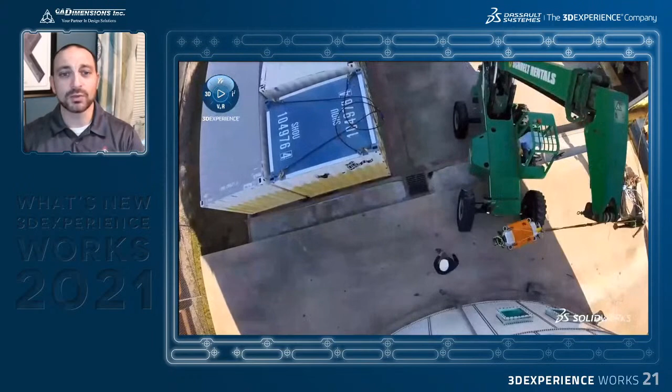Tackling the inspection of dark, harsh, and sensitive environments is a specialty of Square Robot, a startup based out of Boston. Using advanced submersible robotics lowered into a petroleum storage tank, they autonomously inspect the environment for defects in the storage tank. By using these robotics for this task, they've reduced costs for their customers while improving accuracy.

Their design is focused on safety and reliability for these unique environments, providing maximum uptime and allowing inspections to take place when and where humans would otherwise have to wait, right? You've got to drain the tank. Now they don't have to drain the tanks to inspect them. It's really cool, a really awesome assembly too. We really can't wait to show you some of the inner workings of it.

So as we dissect this assembly from Square Robot, we'll be looking at enhancements to SolidWorks Desktop and the 3D experience. Once again, SolidWorks has added a ton of enhancements, expanding the functionality to simplify and speed up your workflows. They've increased the focus on performance, reliability, and optimizing the workflows so you can focus on the task at hand, not where the tools are located.

Then after that, we'll switch focus to the 3D experience, but not away from SolidWorks Desktop. We'll talk about how you can connect SolidWorks to the platform for a new level of collaboration. And we plan on blowing your minds later on when we reveal the immense amount of insight that can be unlocked when you pair simulation with the cloud.

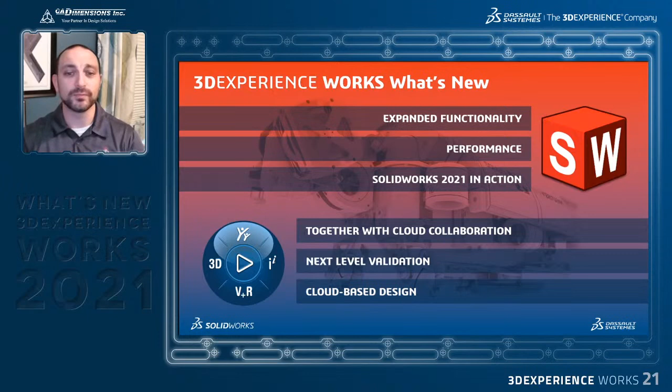I know what you're thinking, everybody: I'm a SolidWorks customer and I came here to see SolidWorks. We've been talking about the 3D experience platform for a few years now. This year's very different. SolidWorks is blurring the line that once divided their flagship solutions from their cloud solutions. The platform now has tools that can benefit everyone, including longtime SolidWorks users like you guys, with greater collaboration. Today, you'll see SolidWorks Desktop files saving directly to the cloud in the same SolidWorks interface that we're used to. All right, that's enough of the commercials, right? Let's jump right in.

As we know, customizing your UI has been a staple with SolidWorks, and it's always a balance between minimizing clutter and having the right tools right where you need them. This year with SolidWorks 2021, you don't have to choose anymore. Let's take a look at some examples.

All right, so we're going to finish this part. We need to cut and pattern this sketch. But as you know, the inactive sketch color and the default part color are both gray. Changing these colors has always been available to us in the options menu, but in SolidWorks 2021, a column of colors is shown, making it easy to find the color you'd like to change, which is really nice. Before, I used to have to click through each one and the color would pop up, which is fine, but this is just a whole lot faster.

All right, let's use a quick green color. Let's change the color to green to make the sketch a little bit more visible.

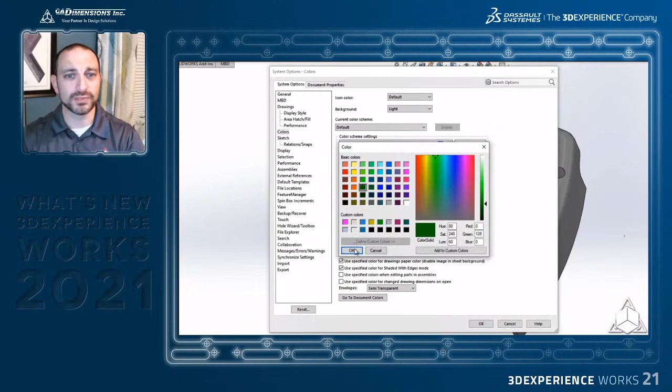Also new in SolidWorks 2021 is the ability to collapse the command manager. This allows us to take full advantage of every inch of our monitor real estate. So we'll just collapse that right there, and then we can also move the quick access tools to the command manager. That cleans up the UI and helps us focus on our design. You can see the setting right here in our tools customize menu.

Of course, all of our tools are still available using the tabs at the top of the screen, but a faster way to work is using the S key. Hopefully a lot of you are using the S key keyboard shortcut, right? Let's add the pattern tool to our S key.

In SolidWorks 2021, now you can finally search for the tools you want and then drag and drop them to the toolbars, so you don't have to find them in the list anymore. You can just search for the tool you want and drag it out. Let's go ahead and drop the circular pattern tool onto our S key. But before I leave the customize interface, I'm also going to search for the undo and redo buttons, and we're going to put them on the heads up display toolbar. You'll see why in a minute.

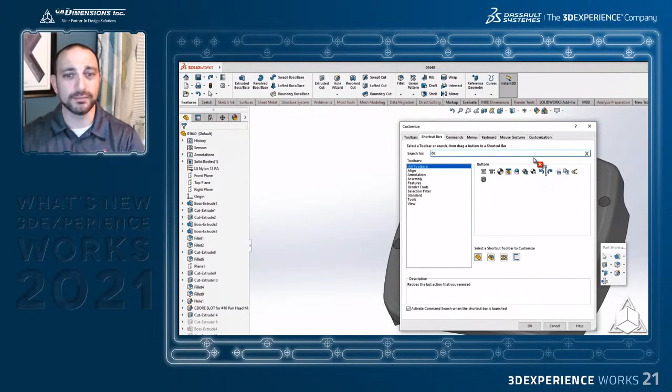All right, let's finish the cut and pattern. Notice how little I'm moving the mouse to create these features. We'll just select the circular edge here to pattern around, and away we go.

And if you make a mistake, it's easy to correct using the undo button. Now in SolidWorks 2021, redo is more complete, allowing you to redo entire feature edits. So you can basically undo and redo up and down your tree. That's really cool.

That means if you accidentally undo a feature, you won't have to spend the extra time to recreate it. You can actually just redo the feature. It's really nice. Okay, so those are just some of the enhancements to the UI for 2021.

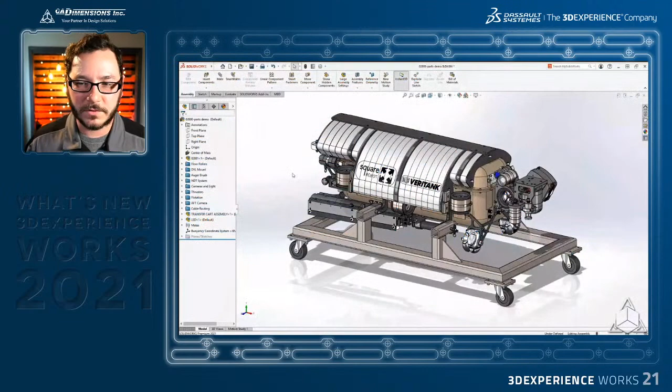We'll slip in a couple more along the way as we go. We'll start off with sheet metal here, and we'll take a look at the trolley system that they use for transporting this robot around. The first thing that we'll look at are two sheet metal components: one is this motor mount bracket here, and the other is the thermal guard on the back side of this for the navigation control unit.

The first thing that we'll look at with these is the ability to modify how edge flanges work on curved edges. We've had this for a long time, but it was limited to originating from planar faces. In SolidWorks 2021, the edge flange can now be created on curved edges originating from non-planar faces, such as these, like in this bend area. So you can see that it now wraps all the way around, and the preview shows us exactly how the flange is going to look at the end here.

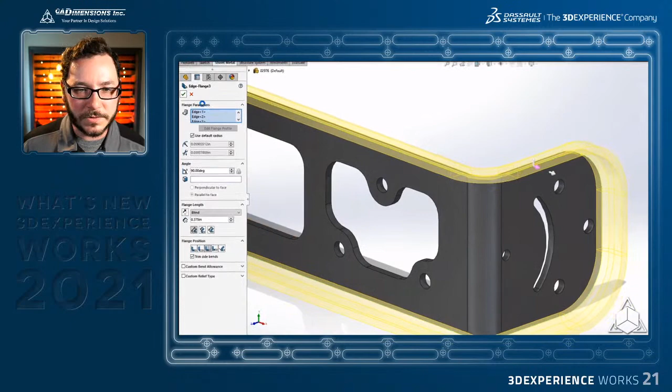And our usual customization tools are still available, so we have the length, angle, dimensioning method, all of that is still there. It really can't get any easier than that. It's a great method for adding in those stiffening flanges and things like that. And of course, it can still be flattened, so if you're going to take this out for fabrication through a DXF or whatever, you can do that.

Now, if we look at the flip side of this other component for the nav control unit, this is another great case for this particular feature. The edge flange on the far side of this needs to protect the components, so being able to have full editing capabilities here to change the angle of this so it actually sticks out a little bit is really beneficial. Obviously, it's still wrapping all the way around the edges.

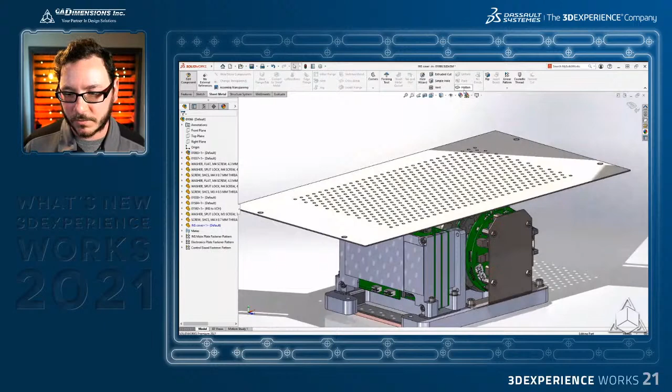So these new features for the edge flange are really neat. I think it really extends the robust sheet metal capabilities that we already had - pun intended there, I guess. But it's good for examples like we just checked, for stiffening, enclosures, things like that, where you don't have to go back in and try to manually work those out after the fact.

Okay, let's change gears a little bit and look at an enhancement to the way we might work when prototyping. We've gotten some features coming along for this purpose over the past few years, and this one is a really nice enhancement that rounds things out so we can see exactly what it is we're going to get.

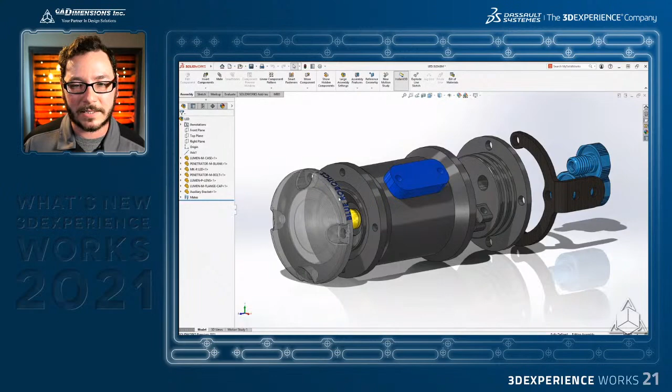In this case, we've got a little LED assembly containing parts of various colors, textures, and transparencies, and we need to 3D print this. In SolidWorks 2021, the support for export and import of 3MF files gets even better than it was. We can see the file type here.

We now have checkboxes added for options to include the materials and the appearances. When these are checked on, the export of the color, textures, transparencies, and all of those things are included, and when we bring those back in, they're included as well.

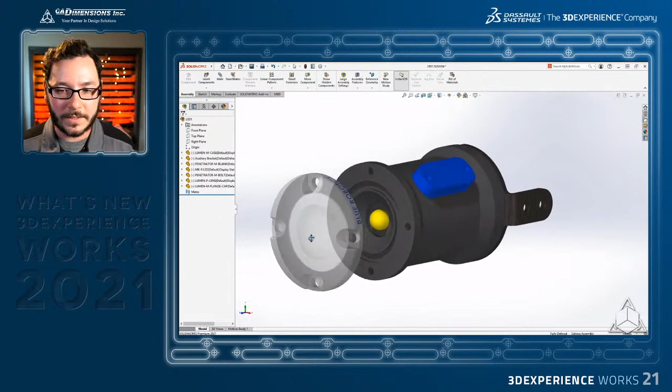So all of that information is stored directly into the 3MF file now, and when we bring that back, we have the ability to retain all of that per-facet, per-vertex coloring, textures, and transparencies, so we can see exactly what we're going to get. Additive manufacturing continues to progress in capability and popularity, and SolidWorks continues to accommodate these technologies, which can be really helpful, especially in the early stages of your process when doing a lot of prototyping.

Now let's take a look at the weldment environment. It's common to use various sizes of weldment members, and in this example we've got a combination of different sizes: the horizontal tubes are a 2x2 tube, and the vertical tubes are 3x2.

The trim and extend tool is used to trim these two together, giving you options to select which corner type you want to use. There are alternate end butt options, and we have miter trim, which bisects the angle between the two tubes. But in this case, the two tubes are different profiles, so it doesn't give us the result we want.

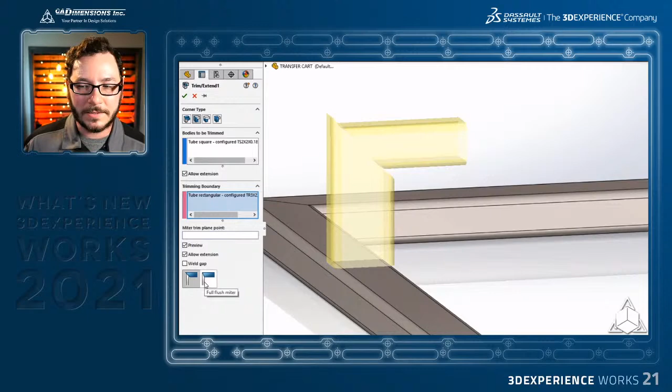In SolidWorks 2021, we have a new option for accommodating this. When we select the flush miter option, it matches those two profiles up to give the miter trim an actual seam there, which we can then use if we wanted to weld these together. So there's no need to go back and make any changes.

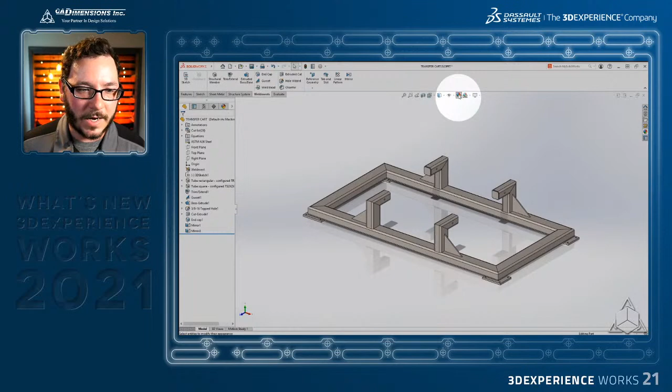Next, let's take a look at the change to the weldment color. If we select the color options for this piece, let's say we need to paint it, we'll choose a color. Likely if you've used this color palette before, you know you can choose one of the predefined colors or a custom color. But many times we need to choose specific colors that align with a brand color or something like that.

Let's take a look at the Square Robot webpage, and the brand colors are pretty easy to identify here. Now in SolidWorks 2021, there is an option for easily selecting colors that don't already exist on the palette. You may have guessed how this works, and the secret is in giving the pipette a little bit more power.

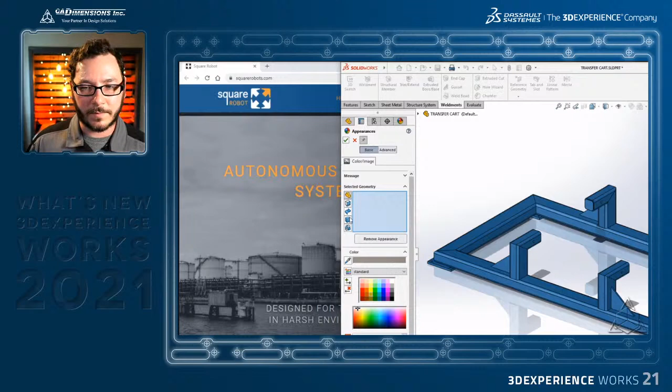When choosing a color now in SolidWorks 2021, just like Visualize, we can drag that dropper icon anywhere on the screen, and the color underneath the dropper will be applied to the selection. Here we've chosen the blue out of the top bar, which applies to the lower frames. We can select these different bodies to apply the orange color out of the logo. The new picker will grab anything it's under anywhere on the screen, a web page or a reference image, or something like that.

Pretty cool. I use that actually quite a bit in Visualize.

All right, let's move over here to some custom properties. Custom properties are a great way to store information about a document, like description, creation date, or material. These can automatically populate your title blocks, bill of materials, PDM, those sorts of things. So they're nice to have.

But sometimes we want to calculate a result rather than input one. Now in SolidWorks 2021, equations are supported in custom properties. For this example, we may want to calculate something like cost. So if we choose equation as the type, we now have access to things like global variables, math functions, or other properties.

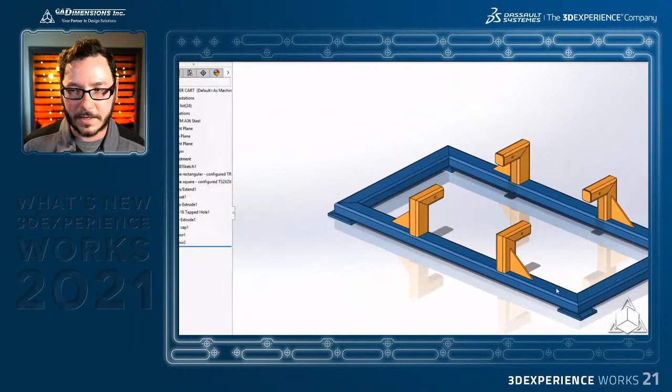For this weldment, the cost will be based on a global variable, which is just an estimated finish cost. We can then take that global variable and multiply it by the mass of the part, and we can see that comes out to be $428 or so.

The equations can be used in cut list properties as well. The plate in the cut list is used 4 times, and we know we want the total length of all the plates. So again, we can just define a property name, choose equation as the type, and multiply the quantity of plates by the individual length, which gives us a result of about 20 inches.

All right, so there we have it. Parts are, of course, the foundation of everything that we're building in SolidWorks. So some pretty cool enhancements there. I'd have to say my favorite might actually be the color picker. Again, a small one, but I really love that one.

Do we have any questions there, Jim? I agree on the color picker, Jess. I'm constantly copying and pasting.

But there was one question about the sheet metal, the material on the bends. Does SolidWorks do any sort of calculations on thinning it out, or is it strictly just like a form feature like they used to handle it? Yeah, that's a great question. No, as far as I know, there's no kind of deformation calculating in there. It's just that they allow you to actually make the geometry now. So I'd have to double check on that, but I don't think it's doing any calculations in the background for deformation yet.

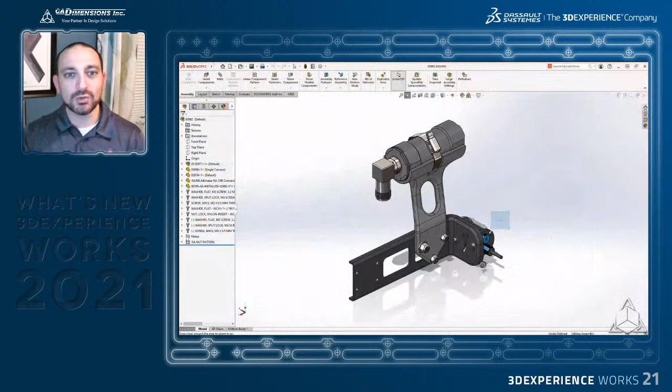So let's take a look at mates first in SolidWorks 2021. They streamlined the property manager. So let's go ahead and add a mate, a coincident mate between these two faces.

If we take a look at the mate dialog, we can see that instead of expanding the sections for each group type, there's now tabs for each group, making it easier to find the correct mate.

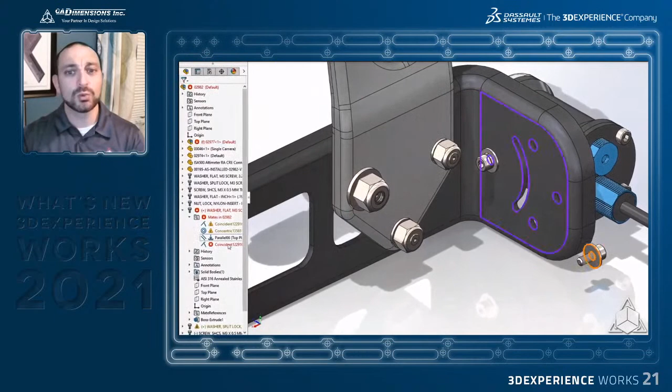If we take a look at the mate that we just created, if I flip the mate alignment, you know what's going to happen, right? We get the question on what to do with all the other mates attached to this one. Choosing no means over-defining the other mates to solve for the new alignment, which creates more work to fix those other mates. Choosing yes would have avoided this issue by instead flipping all the other mate alignments.

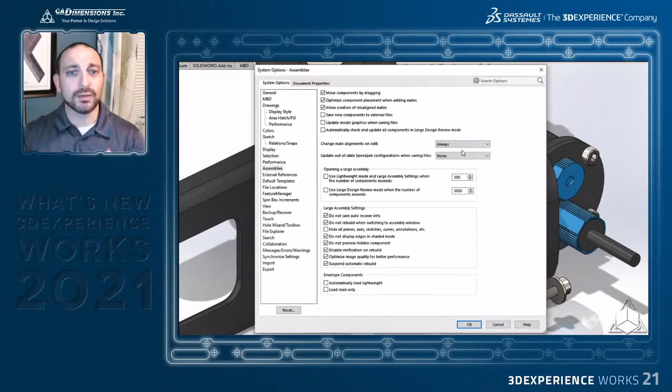Okay, we've all seen this box before. In SolidWorks 2021, there's a new system option under assemblies to choose how to always select one of these choices, or to keep asking you every time. That's really handy, so it doesn't necessarily have to ask you every single time. Choosing always will by default flip the alignment of all the other mates, and this is going to save you a little bit of time and some confusion, and ensures you always get the results that you want.

All right, so next we're going to create a slot mate. When creating slot mates in SolidWorks 2021, you can now choose the default type of position in a slot mate. In this example, the center slot has been selected as the default choice, so you can see it jumps right to the center of the slot. There's also the option to lock the rotation of a slot mate, just like in concentric mates.

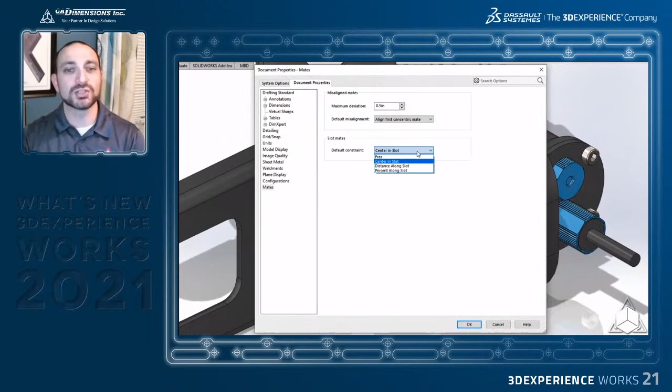And the default slot mate location is also a new setting. This is a document property though, but it's going to eliminate the need to regularly change the location type when adding a new slot mate to your designs, saving you a little bit of extra time and avoiding accidentally choosing the wrong constraint. Again, I want to remind you this is a document property, so if you're going to save a new template, you have to save it in the template.

So next, what we're going to do is take a look at assembly patterns. SolidWorks has always offered the ability to change the configuration of each component instance within a pattern, and sometimes you may just want all of the patterns or all the components to reference the same original instance. This can be time consuming to do one at a time.

New in SolidWorks 2021 is the option to synchronize the configurations of all the component instances created by the pattern. It's a mouthful to say, but it's pretty obvious what it's going to do, right? It's always going to keep the component instances synced up with the seed of the pattern.

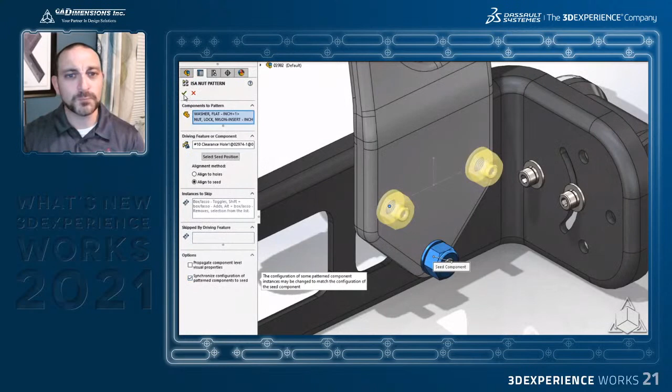This option also helps avoid accidentally changing the configuration of any one of the components, by disabling the drop-down menu, and it grays it out in the component properties dialog too. So let's go ahead and change the configuration of the seed component and watch them all change.

Pretty cool, huh? Finally, let's take a look at interference detection. It's a powerful tool to quickly find issues in our design. And if you've ever taken SolidWorks Essentials, you know that we devote a bit of time to this in the last lessons of the book.

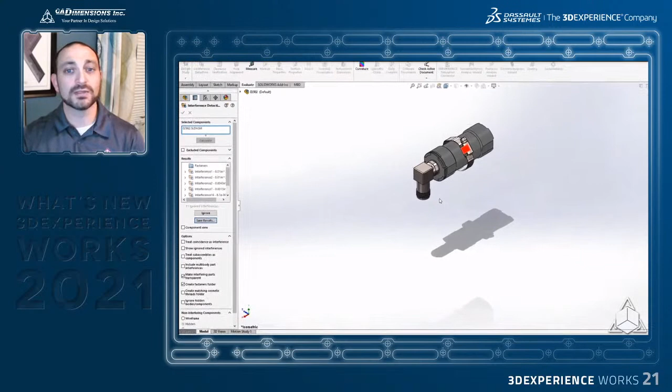SolidWorks 2021 now offers you the option to save the results out in a spreadsheet, an Excel spreadsheet. So that's pretty cool, you can export all of these results, you don't have to look at them in SolidWorks. We even have the option to capture a screenshot of each interference so they can be shared and reviewed with others. This new way to take a look at the interferences is really cool, again in collaboration. SolidWorks is all about collaboration, especially this year in 2021.

So here we can see the spreadsheet that came up. We can see the really nice screenshots. Interferences are all labeled, and the volume is all labeled, and everything like that. So it's a really cool feature, a real cool enhancement to assemblies in 2021.

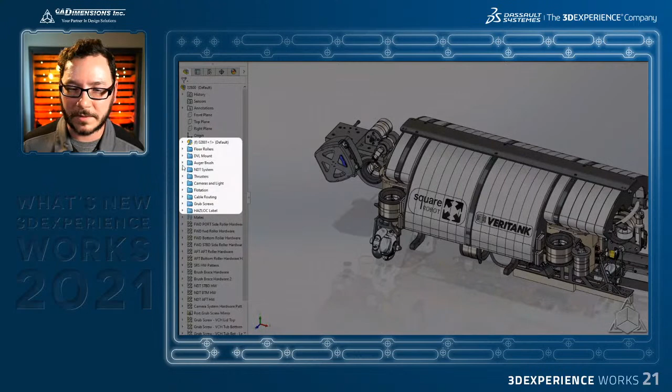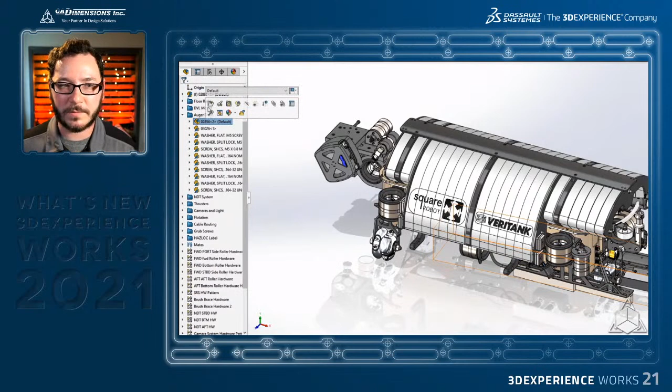And as cool as that is, I think that this next change I'm going to show is one of the most powerful changes to performance optimization that I've seen in quite a long time. So let's take a look here how the transition from lightweight to resolved now works. There's a much more streamlined approach to getting access to the information that you need. This year, just expanding a component out from the feature manager tree will now dynamically load those components on demand, giving you access to the fully resolved subassembly or part. So no more right-clicking and resolving components or assemblies one at a time, just expand it out and it gets resolved for you automatically. I've already been using this quite a bit, and it really does take a lot, if not all, of the residual inconvenience out of working with lightweight components. I really do like that a lot.

Working with configurations is now also faster in SolidWorks 2021. Both creating new configurations and switching between them is quite a bit quicker. In a moment, we'll talk about how that can be combined with another new enhancement to really improve performance while retaining detail.

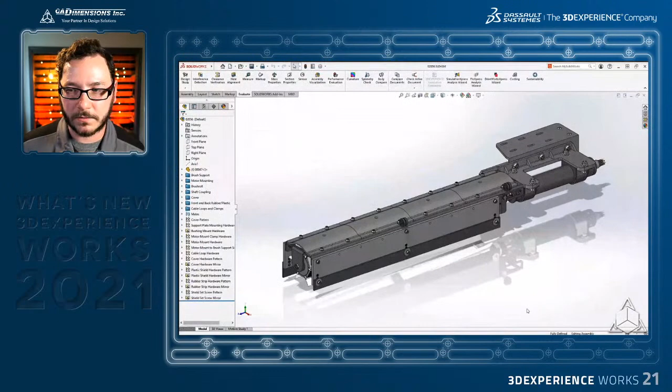But performance evaluation has always been a valuable resource in SolidWorks to give you some insight into the areas of the design that cause performance issues. And new for SolidWorks 2021 is the analysis and reporting of those pesky circular references in your assembly. In this case, two holes on two separate parts have been found to reference one another, and we can use this information to investigate the model and figure out what it is we need to fix. So by isolating these two components, we can quickly figure out what the issue is here.

In this scenario, one of these components listed in the report contains a hole wizard feature, and the locations of the center points are concentric with the edges of the hole in the next part over. This is a common top-down design practice, just to make sure all of your holes stay lined up. However, when we look at the second component's hole wizard, we'll see that it has a similar situation. But it appears that the center points here are referencing back to the edges of the previous holes. So since both features are trying to define the location of each other, we have a circular reference.

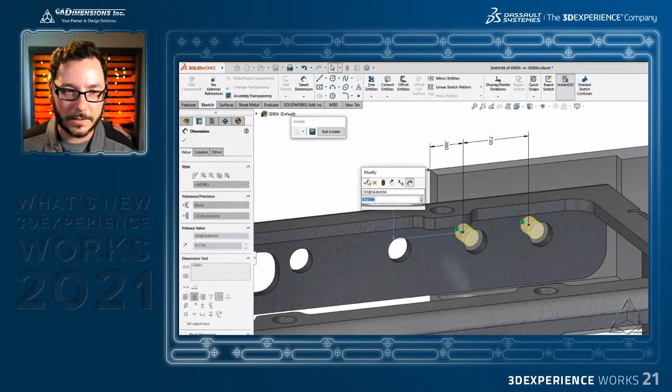And to fix this scenario, all we need to do is remove the external references and redefine the locations of the hole, which in this case we'll just do with some dimensions. Once the holes are redefined, all of our changes have been made. A quick rebuild will remove any of the warnings in the assembly, and we're all set to go there. So this year it's much quicker, much easier to zoom in on those problem areas that we might have, and clear up those issues nicely, quick, and efficiently.

And finally, we'll move over to an enhancement to the Silhouette Defeature tool, which was introduced in 2019.

This allows us to create simplified representations for performance gains or to protect your IP. The Silhouette Defeature tool really provides a nice step-by-step workflow, as we'll see here. While you're selecting the components, bodies or subassemblies, whatever you're grabbing, this will always have a nice side-by-side view to show what's finished and what it will look like when you're finished with the defeature mode.

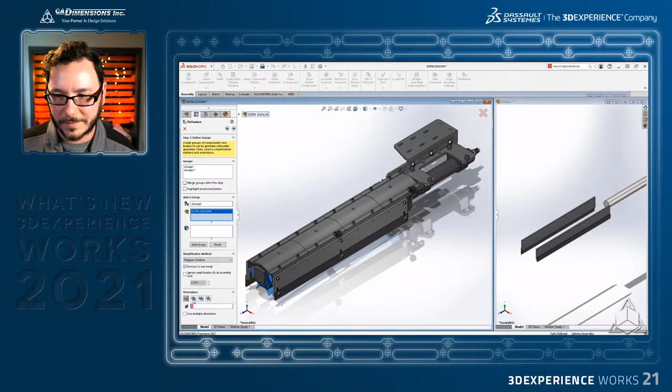The simplification methods range from shapes like the bounding box or cylindrical representation to things that are a little more complex, like the polygon or tight fit ones. Those ones just add a little bit more detail to the final results.

In this example, we use a variety of methods to approximate the shapes in the subassembly. This process can apply different methods to different parts, so we can tailor the amount of detail that's retained in each section.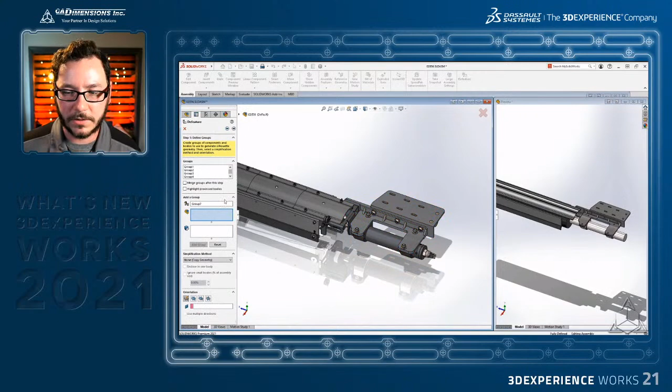We've used all of the simplification methods except for none, and there may be times when some components in your subassembly are critical to show in all of their detail. For those instances, you can choose the copy geometry method or none to capture all the detail - you can see they just copy right over.

The Silhouette Defeature tool in 2021 now has the ability to save this as a configuration within the same assembly from which it was created. This eliminates the need to manage separate files for the simplified model - everything is just contained in one place.

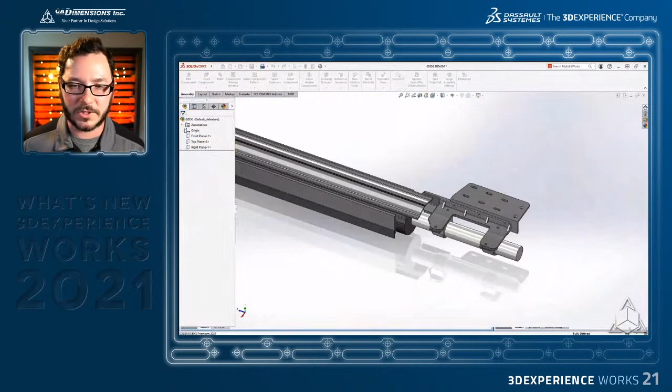You may still want to use those other options if you're sending the file out to somebody and you just want to remove the detail or remove some IP out of it. But now you've got the flexibility to either keep it together or completely separate them depending on your purpose.

When you're using defeatured models with higher level assemblies, it's now just as simple as right-clicking on the component and choosing that defeatured version of it. Just a right-click here, use defeatured, and it will switch itself over, which is pretty cool.

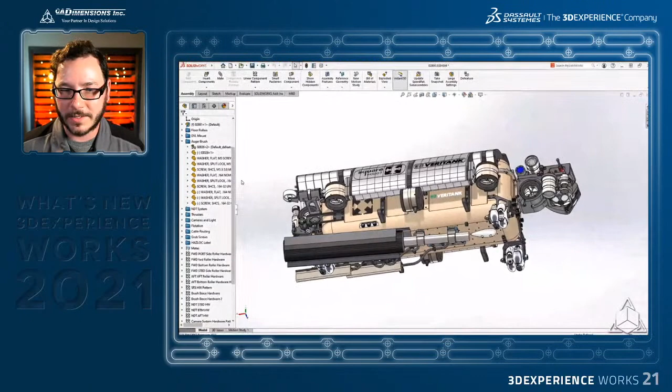Those defeatured assembly configurations really provide a nice way to add some performance boost by choosing essentially when you need the detail. So speaking of performance boost, let's move on to some graphics performance enhancements here.

The graphics performance mode was introduced in SolidWorks 2019 as well, and that fundamentally changed how the graphics are handled by SolidWorks in your certified graphics card by providing much higher frame rates and much smoother response. Let's take a look at how that has progressed here this year as well.

This system option, which you can find under the performance settings, is now enabled by default in SolidWorks 2021. So that's good to know. The only thing we've noticed is if you carry over your settings and you had it checked off, it may still remain checked off. So if you do want to use it, I would recommend going and checking it.

If you don't want to use it, I would recommend checking it as well - just be aware that it's there. It is intended to be checked on by default.

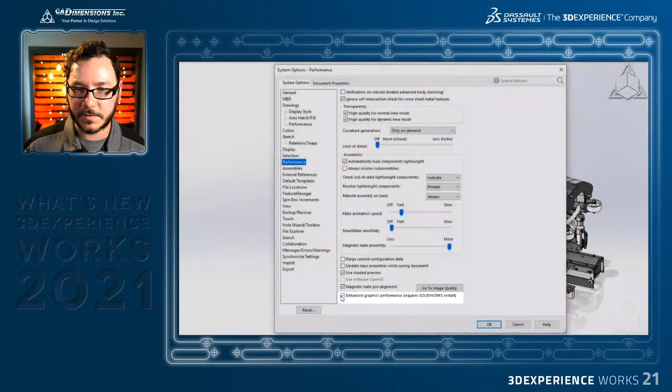To see the difference here, we'll compare this setting enabled and disabled side by side, just running a macro. That macro will just repeat the same 500 mouse rotations, and we can compare what happens between the two here. So it's clear to see that the graphics performance is going to be significantly faster, but take a look at this comparison.

The actions took less than 8 seconds and ran an average of 63 frames per second with the graphics boost enabled. Meanwhile, with the setting disabled, it took nearly 162 seconds at an average of about 3 frames per second to do the same movements. So we're talking a difference of 8 seconds versus 3 minutes, essentially, between those two, with just that checkbox turned on and off, rotating the model.

Now, if you haven't tried the graphics performance option yet, 2021 provides two new reasons that you should give it a try. The first is working with hidden lines removed and hidden lines visible, and we can see this here with this model.

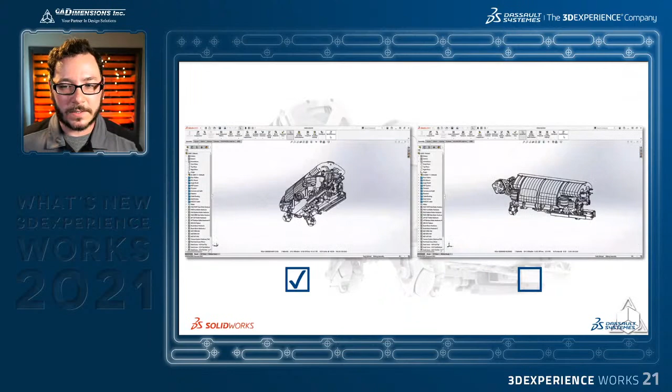Calculating silhouette edges is always a graphically complex task, but previously that was handled by the CPU. In SolidWorks 2021, all of those calculations are now handled by the graphics card, by the GPU. In the case of this assembly, there's a lot of silhouette edges we have to calculate across the model, and like before, the difference is crazy.

With the GPU silhouette edges, this example ran in less than 5 seconds at over 100 frames a second. With it disabled, again, it was 170 seconds and only averaged less than 4 frames per second. That's a massive difference in speed when working in those two modes.

Now, the second enhancement is the addition of occlusion culling technology in the graphics performance, and this is actually really clever.

If you follow me on LinkedIn or Twitter, you may have seen that I posted a demo of the Unreal Engine 5 when it came out a little while ago. One of the things that I thought was really cool about it was that it was able to take huge amounts of detail and then only render what mattered to improve the performance.

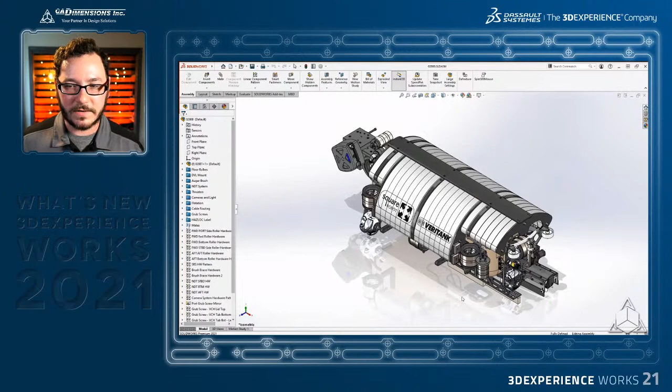And that's exactly what occlusion culling does for us here in SolidWorks. It's just rendering what's in view, so if it doesn't see it, it doesn't need to be rendered. So let's take a look at an example of this here.

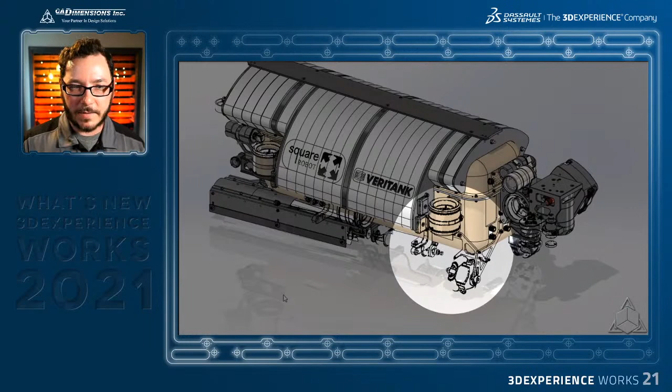With a special development build, the occlusion culling has been paused, so we can actually see what it's doing in the background here. You can see that several of the components that were previously out of view were never rendered by the graphics card. They were hiding in the back from that view, so the graphics card didn't need to process them, and it left them out. This is just paused for example purposes so we can see what it would do.

Another case here is that the more components you have, the more likely you are to see benefits from that as well, because the more likely there are components that won't need to be rendered by the card. Some pretty cool enhancements there.

Like I said, I have noticed a difference already. I was texting Franco and Jimmy last night, working with an assembly with configurations, like, man, this switches almost instantly. It's really cool. So what do we have, Jimmy? Do we have any questions on any of that in the chat?

Some awesome stuff. A couple of comments. One question I have is, do I need any sort of special video card or anything like that to take advantage of that? Is it a specific OpenGL format or something like that?

I will say that this version will be more sensitive to making sure you've got a certified setup if you're using that mode. I would say any of the newer versions that are certified, you'd probably be in good shape. We'd be here for a while just listing off specifics, and I don't know exactly off the top of my head, but you probably want to be on a certified setup with a certified driver before you go testing that for sure.

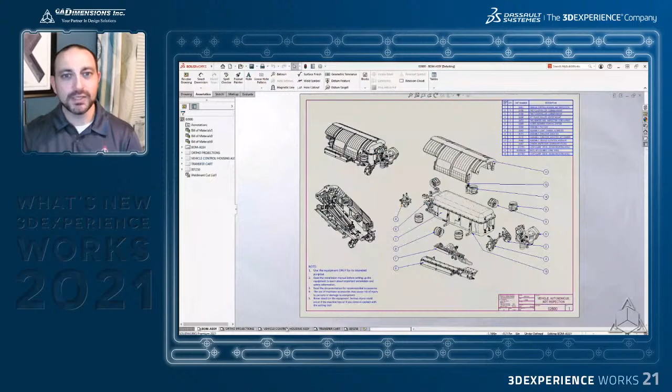When working with large assemblies and drawings, view manipulation is vital to a good experience. Over the years, SolidWorks has worked really hard to optimize view manipulation on screen. Detailing mode was introduced in SolidWorks 2020 to allow us to open massive drawings in seconds, and I'm going to show you in a bit how much more they've added to detailing mode. But first, we're going to do a side-by-side comparison of SolidWorks 2020 and SolidWorks 2021 with the enhanced graphics mode that Jesse was talking about before.

So here we have SolidWorks 2020 on the left and SolidWorks 2021 on the right. The same 5-sheet drawing is open in both - this is a top-level assembly drawing. Let's start by panning the drawing in SolidWorks 2020. It does an okay job, but you can see there's a lag as the drawing doesn't really follow the mouse. I know we're streaming this over YouTube and there's a little lag on YouTube, but on my end, this looks silky smooth. There's no lag between any of the panning.

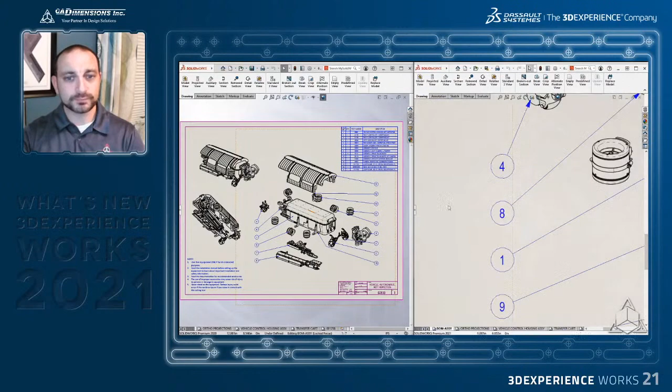We're zooming it in now - there's no lag in the zoom at all. Okay, so now let's pan and zoom over in SolidWorks 2020, doing the same thing. We can see, even with the YouTube lag, there is some latency. This is bad because you can sometimes overshoot your zoom, overshoot your pan, and then you just spend time trying to find what you're looking for. So even when zoomed in, it's a little bit better - the scroll bar is a little better - but in SolidWorks 2021, silky smooth.

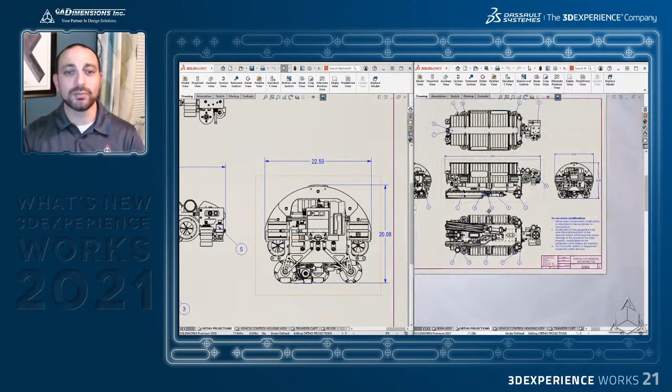The second sheet of this drawing contains even more views. Again, this is a 2,400 part assembly, and the performance difference is even more pronounced. For years, the SolidWorks development team has been working diligently to write code and partner with video card vendors to continue to raise the bar for performance. This enhanced graphics performance, like Jesse was talking about, is paired with the modern OpenGL 4.5 - that's what we were alluding to when talking about drivers and new hardware, that OpenGL 4.5 graphics cards. But SolidWorks 2021, I tell you, these are silky smooth to pan and zoom in your big drawings.

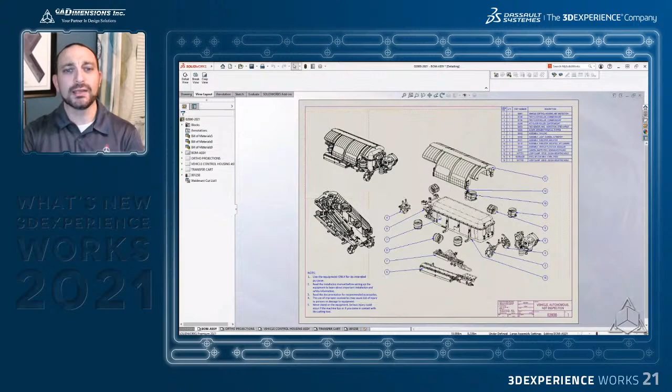Now let's take a look at detailing mode - this is what I was talking about before. Detailing mode was introduced last year, and it provides a way to open huge drawings in seconds. Last year there was a huge list of what we could and couldn't do, and now in SolidWorks 2021, they gave us the ability, in detailing mode, to edit and add dimensions and annotations right within detailing mode. And remember, the model doesn't get loaded, so sharing the drawing files is super easy. I'll talk a little bit more about that later on.

So here we have this note, and like I said, we're going to edit annotations. Existing notes can be edited, and you have full access to all the note editing tools.

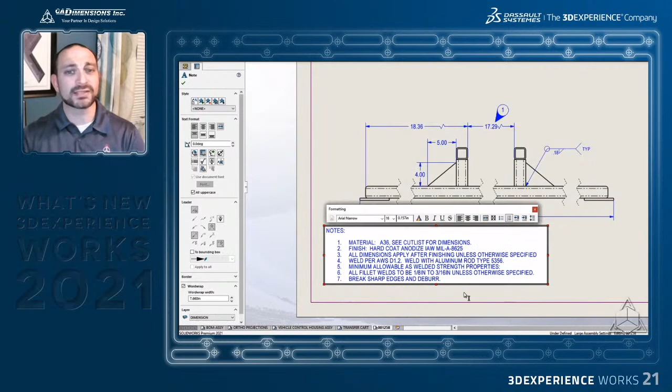If we take a look at the front view, we see that it's broken with foreshortened dimensions, but the top view isn't. Detailing mode in 2021 now supports broken views, cropped views, and even detail views.

So let's go ahead and break the top view in three places, just like it is in the front view: to the left, in the center, and then on the right. You can see that all the break view options are available, along with the break line styles, gaps, and things like that.

Ordinate dimensions are also supported, and now we can add additional things to the ordinate dimensions. We're going to do that here to these edges and these center lines, so you can add dimensions to the ordinate views.

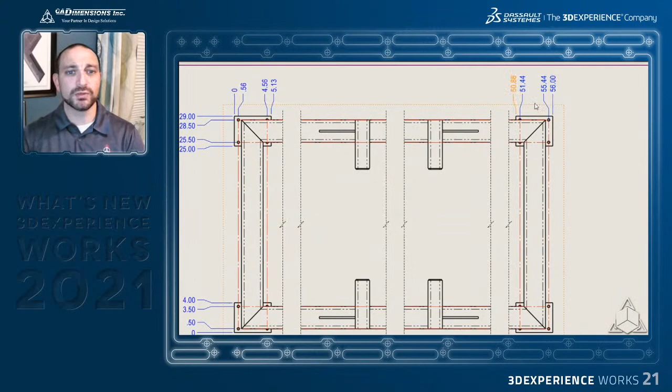Detail views can also now be added in this mode, the same way as if the drawing was fully resolved. So we can add a detail view here—we just make our circle and place the view.

When detailing drawings, sometimes it's common to define hole information, and now in SolidWorks 2021, detailing mode supports hole callouts as well. It didn't support them in the past. So we'll go ahead and add a hole callout for this hole.

And it's even smart enough, if I add a dimension here, to add a foreshortened dimension to this detail view. Also, existing dimensions now have full editing capability.

Let's go ahead and add a symmetric tolerance to this dimension. All the dimension properties are now available, including tolerance and precision.

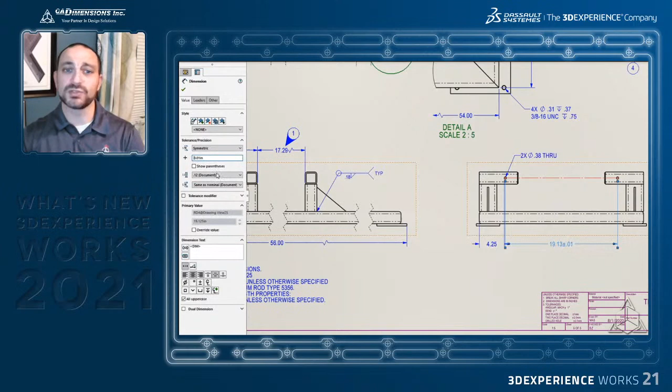But the enhancements to the drawing environment don't stop there. Regardless of how you open a drawing, the dimension tool has been enhanced to make it easier to create dimensions. Let's go ahead and add some dimensions in here.

We'll add a dimension here. And if you notice, the second selection is kind of tough to see, so I'm going to do it twice. The second selection actually makes the text and the dimension transparent, so you can select through the dimension, and it's easier to see what you're selecting.

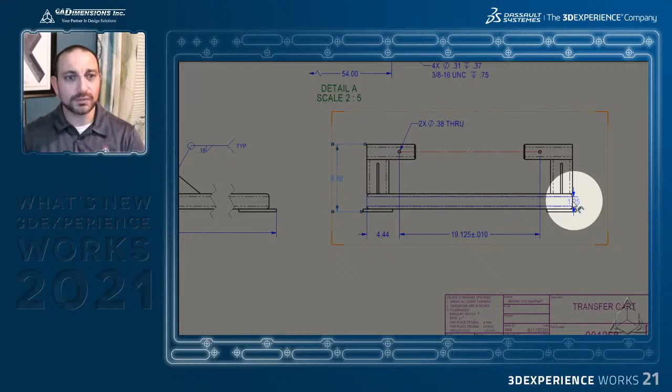Next up, VDA balloons are used in the German automotive industry, and they're a requirement for many of our European customers. Now we can do VDA balloons and notes to allow users to tag inspection dimensions and inspection points per VDA requirements—just a checkbox in the property manager here.

Just like every other annotation in SolidWorks, you can easily modify its position and rotation. An even cooler feature that I really like is that VDA balloons can be read in by SolidWorks Inspection.

Finally, when you have sketch geometry on your drawing, which a lot of times you do, you have to add sketch relations, right? Just like we do in a sketch, we don't want our sketches blowing up. Well, now in 2021, we can see they've added these sketch relation tools right from the pop-up, just like it works in a sketch.

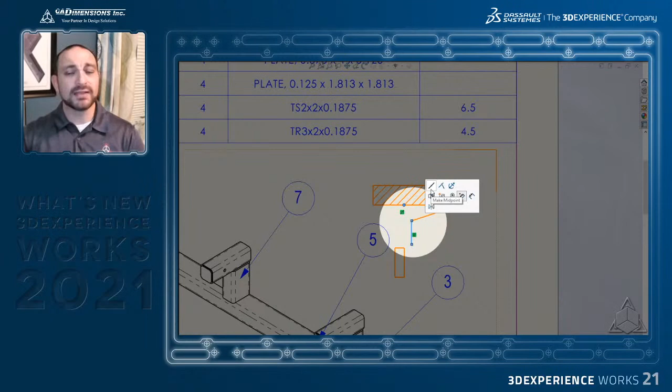So you don't have to go all the way to the left-hand side to the property manager to add sketch relations. That's really cool.

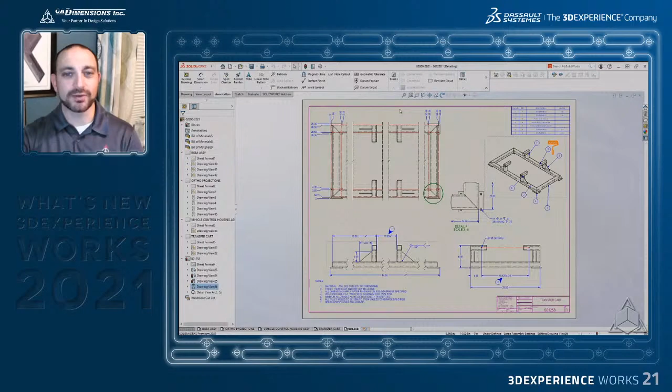Every year in SolidWorks, drawing enhancements get the most oohs and ahs. And this year, again, like I keep mentioning, we can't hear them, so make sure you type them all up in the chat, okay? Let me go back here and we'll review these.

Again, a lot of drawing performance and detailing mode enhancements in SolidWorks 2021. I just want to reiterate that the detailing mode does not load the model in the background, so you can even open a model drawing in detailing mode without having access to any of the files, which is really, really cool.

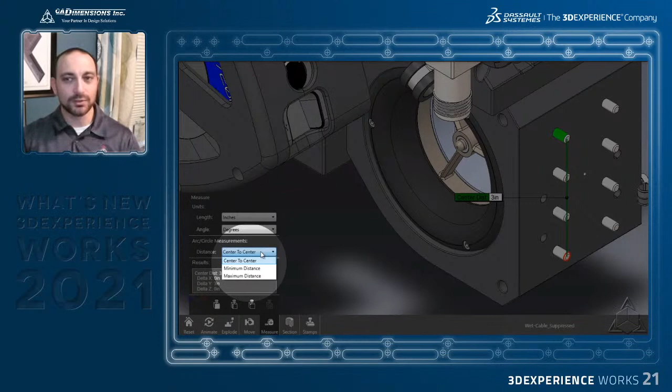Commands like the measure tool have been significantly improved as well. We can find the center-to-center distance of two cylindrical or circular objects - we've been able to do that for a while, but now in eDrawings 2021 you can see the little preview here, we can do minimum distance and maximum distance as well. So that's kind of cool, it's more like SolidWorks. You can also measure the normal distance between planar and cylindrical faces.

Again, working more and more like the SolidWorks measure tool.

Next, sharing your design. We tested this a little earlier. Sharing your design without the requirement to install eDrawings is easier than ever. You just save it as a new file type called web.html. Okay, it's not a new file type, it's new to us. Web.html now allows any browser you have to open these files.

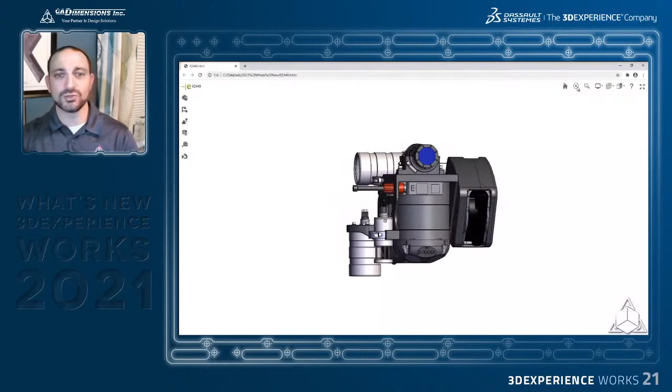It's pretty cool. So here we have an example of that. It allows you to pan, rotate, zoom, view configurations and exploded states and section views, all sorts of stuff. The web.html format now supports measuring as well, which is basically full-blown eDrawings inside your web browser.

So you can just share this HTML file. It's a single file, and you can share it with anyone, and they basically have full eDrawings in their web browser. It's pretty cool. And then lastly, in the web HTML we have the ability to move and rotate bodies and interrogate large projects without having to dig through an assembly tree.

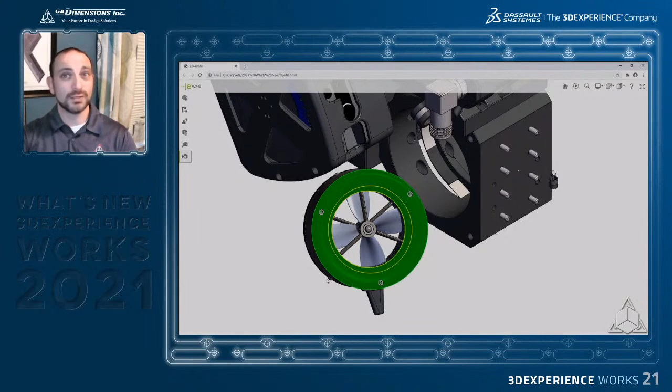So like I keep saying, this web HTML format is basically like a zero weight eDrawings viewer, because it just runs within any modern browser. We tested this on Chrome, and it works really, really well. It even works on our phones. A little bit earlier, we were testing it on our phones, and it works really well.

So again, not a long list, but eDrawings 2021 gives us the features we've been asking for, making communication between SolidWorks and non-SolidWorks users seamless. So I really, really like that.

So I'm going to pass it back to Jim, and I don't know if anyone typed in the chat, but we can certainly talk about both the features. Yeah, thank you. And actually, one of the questions that came up for me personally with the eDrawings was...

In the past, we always had trouble sending the zip files through email. I did receive an email from Franco, and I have it open on my phone, and it actually works pretty cool. Directly from the email, I was able to open the web HTML of your file. So super excited to be able to utilize that new technology with so many people on the go and working from different places. I mean, obviously the three of us aren't in the same office anymore, so we're making do, and tools like this are definitely helping out.

This is an excellent segue, Jim. Yes, to Jesse's favorite new topic, the 3D Experience, and it's much more, like Jesse alluded to, than just a web portal platform thing. So we'll let Jesse talk a little bit about how this tool can help remote situations. You're good. All right, thanks, Jim.

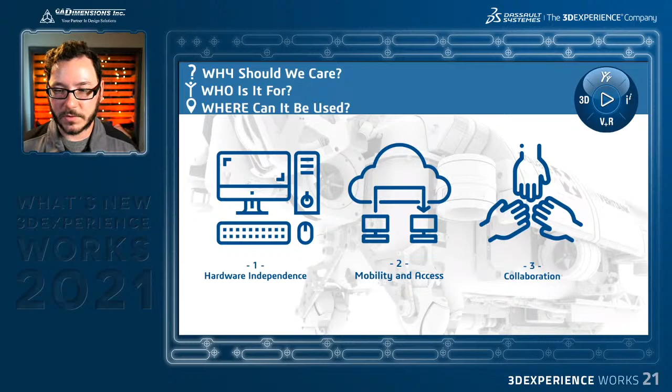And where can it be used? Obviously we kind of touched on that too. The answer is literally anywhere for the majority of it. So assuming you've got SolidWorks as your primary design tool, that's still local. But outside of that, most of the rest of that work can be done wherever you are.

All right, so the next question then is, what can it do? This is obviously a loaded question, but we're going to try to break this down, as Franco mentioned early in the presentation, into just a few brief slices of capabilities for you here. So let's start with a simple example of how engineering data might be discussed and progressed on a daily basis. Say, for example, we've got this engineer named Eric. He's working in SolidWorks desktop right now.

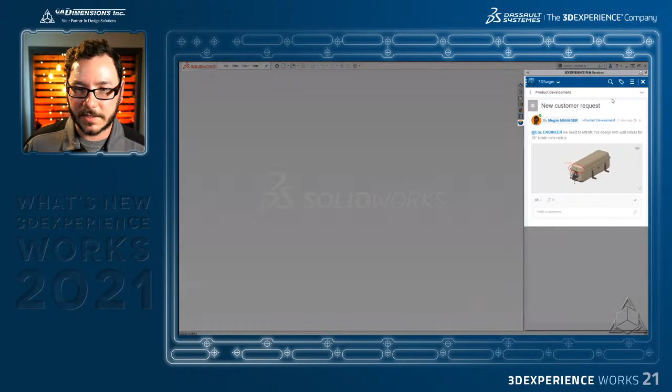With the 3D Experience platform running in his task pane, he gets a notification from his manager, Megan. Clicking on the pop-up opens his 3DSwym app, and he sees a discussion thread involving a new design request—they're asking him to add some rollers to an existing assembly. So he can search directly for the model he needs to work on.

When he finds that model, he can drag it directly into his SolidWorks session. Just search it up, drag and drop, and that pulls the data from the cloud into his session. With a right click, he can go ahead and reserve this, so he has rights to start doing some work on this particular set of components.

Once he makes his design changes—we'll skip over that part, you guys know what you're doing there—he wants to make sure he knows where the assembly is used before saving it. So a quick tap on the Relations app gives a nice graphical view of the parent-child dependencies.

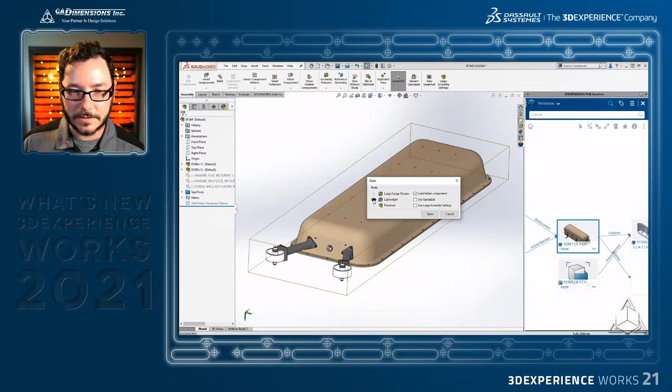He finds the top-level assembly, which he can then load right in. Notice he used lightweight mode, just like we always would when opening a model into SolidWorks, especially given the enhancements shown earlier. But in this case we might be downloading some data, so using lightweight mode is nice for not having to download things back and forth.

When we've got this loaded in, we see that we can again right click right in the top level, and go ahead and reserve that so we can make our change to the top level. A right click there, reserve, and save.

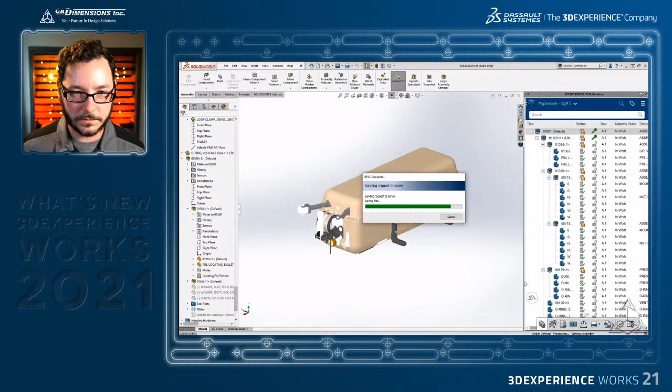We can go ahead and add a new revision of the component that Eric just made a change to—checkbox on there, hit save. And now our data is headed back to our secure storage on the platform.

So we've done some design work, and let's say Eric now has to head out of the office. He's still got some work to do—top assembly, into Product Structure Explorer. This gives a nice graphical view and a list view side by side, which can be arranged and filtered out however you like, making it nice and easy to find things.

In this case, locate the new components we've just created, these rollers. We want to add and attach a PDF to these files with installation instructions. This is a nice way to keep things all in one place—add the components, take the documentation, and stick them right to the part or assembly itself.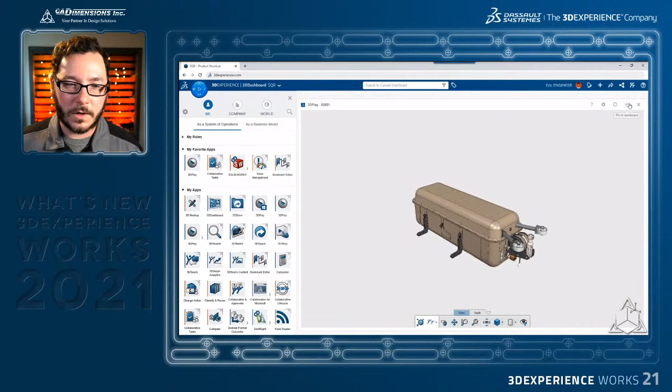Now it's time to update the team, and this is where things get cool. Instead of an email, a phone call, or a web meeting, he can create an interactive dashboard with exactly the information he wants his manager to review, sending information as he sees it on his screen to be reviewed.

He's created a 3D Play viewing app—you can think of this kind of like an embedded e-drawings view. He grabs a screenshot so he can post that back to the discussion thread while he's at it.

Next, he launches the Bookmarks app, which is a convenient way of organizing shortcuts to things you want quick access to. Notice how easy the interface is to customize—you guys know I have a soft spot for interface customization.

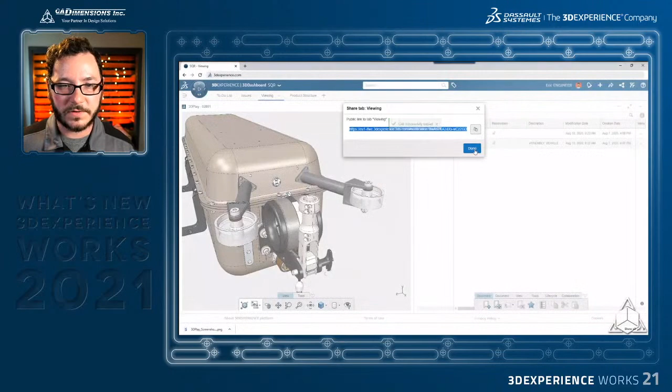When he's ready to share the dashboard, he just copies a link to that, and all the applicable information that needs to be reviewed is all there in one link for his manager to check out, or whoever is involved in this process. To finish this off, he takes that link and puts it back into their design discussions.

You can add a comment, put the link in, add a screenshot for extra clarity, making sure everyone's looking at the same thing. Everyone's up to date with all the information specifically that they have to look at for that particular change.

So when you're connecting SolidWorks to the platform, you really get the best of both worlds, because you can continue using your SolidWorks tool as your design tool, but then allow that data to get up to the cloud where everyone has access to it from wherever they might need to be.

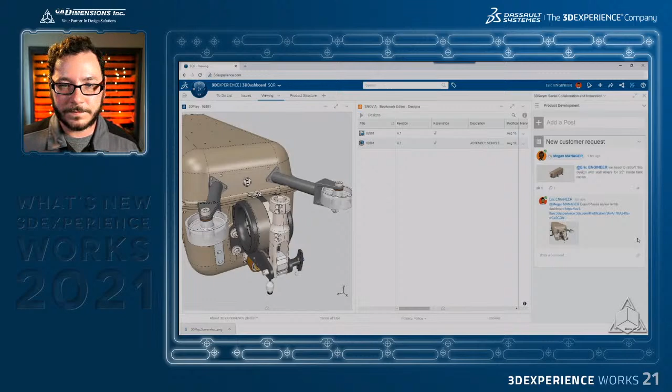All right, so I'm going to pass it back to Franco here in a moment. Did we have any questions here, Jimmy? Franco's promising he's going to blow everyone's mind with this next part, and I suspect he will. But any questions on that?

Some cool stuff, and I'll say I was also a struggler with this. I left this file at the office, or forgot to upload it to my drive. Whatever it may be, being able to just turn on an add-in, similar to turning a PDM add-in on, and having my stuff pushed to the cloud with all that additional info. That workflow post thing you had on the right is pretty cool, to keep a project in order, and the updates for that project stay in that project. Exactly, you end up with one place to check for things, which is nice. And of course, it's searchable too. And what you showed, that's between just two people.

Imagine if you had a team of 5 or 6 people working on the same project, the same assembly, always communicating and always talking. It's a consistent place to all communicate and share data too. Yeah, exactly, it definitely seems centered around CAD versus some of the other collaboration tools we have, which can be tough to connect everything. Very cool, I like that.

Franco, how are you going to blow my mind? What do you got? I'm going to build on what Jesse was saying. So let's see what Franco's excitement is all about, because he's smiling like he's happy and got some good stuff to show, so he might have some tricks up his sleeve. You're good.

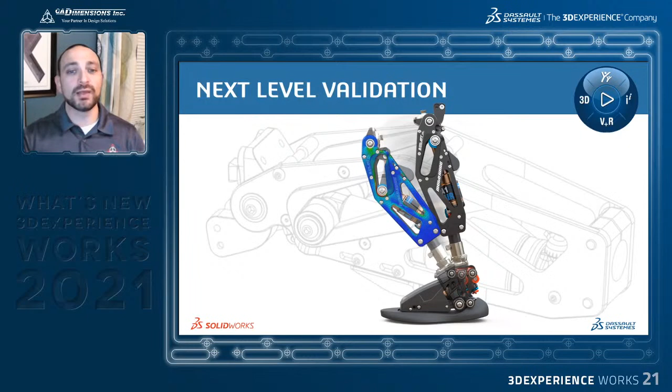What we're looking at is the Moto Knee by a company called Biodapt. If you were at SolidWorks World last year, or 3D Experience World last year, you saw these guys up on stage, and it's pretty cool. But if you weren't, this is a prosthetic leg with extreme sports in mind, so it has to withstand higher than usual force and higher than usual shock loads. Let's jump halfway through a design cycle and see how the 3D Experience can streamline the workflow and get this product out the door faster and more safely.

So this is the first revision of the frame of the Moto Knee, and this is the company's dashboard on 3D Experience. We see that our analyst found a mechanical issue with this revision. From the simulation results, right from any web browser, we can see that this bottom bracket is flexing way too much. There's too much stress and too much displacement in this bottom bracket, so we need to make some changes.

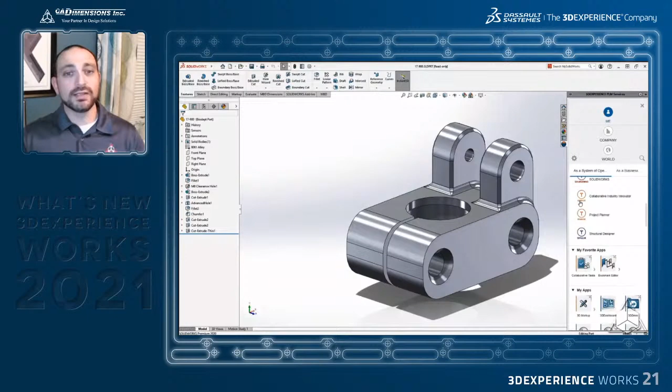So let's go back to SolidWorks, right, this is the SolidWorks we all know and love. Let's design a new bracket. Obviously this is way fast forwarded, but we have this new bracket design, and we want to make sure it's going to be strong enough to meet our needs. The simulation apps in our structural designer role can guide us through all the steps to validate the strength of our new design, and the built-in assistant makes it easy to add loads, restraints, fixtures, materials, and all sorts of things, walking us through the steps.

Okay, we'll just add some loads and run the simulation here. And because we're all in the same environment, our analyst can take a look at these results, just looking at the stresses in here.

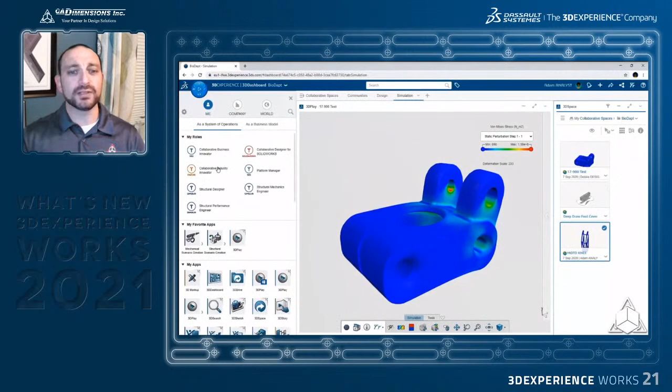Once we're confident in our new design, now that we've seen all this, we update the Moto Knee assembly and change and update the revision. We can send it there and just update the revision in the assembly right within the dashboard. So when the analyst sees this, he can do it all and rerun his analysis at the top level.

Since both the designer and the design and the simulation data are stored and connected on the 3D Experience platform, the analyst can easily create the new simulation.

He's going to use the assistant as well to make sure he doesn't miss anything, and now we can compare the results from the two studies, the first study on the left and the new study on the right. We can confirm that the new Moto Knee lower bracket is now strong enough and it doesn't see that same displacement.

So again, it's all about the collaboration, and whether or not you're an analyst, you can work in conjunction. Whether you take a part out, make a new part, you can swap parts out just like you would as if you were on the same network, but you're doing it wherever you are. It doesn't matter wherever you are, and the communication is opened way up.

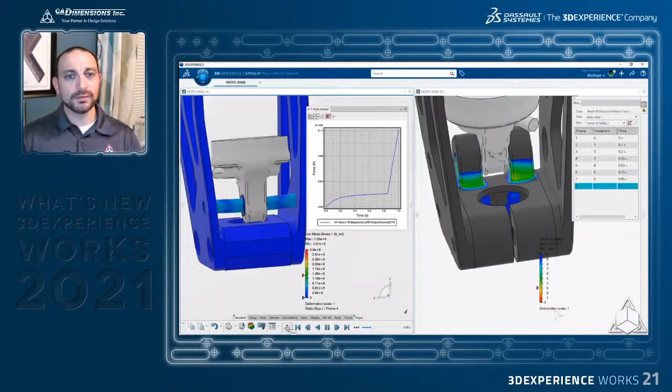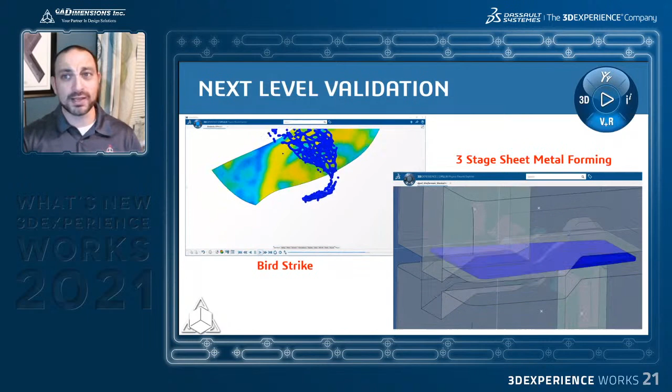Here's some large deformation, dynamics, multi-physics capabilities. There's a bird strike on an airfoil, and a three-stage sheet metal forming with large displacement.

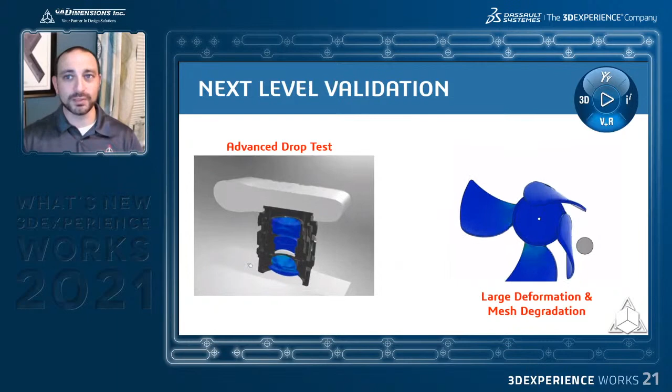I have one more slide though. There's so much more that I can't show you because of time constraints, but look at the advanced drop test, advanced collisions, advanced contacts. And then probably one of my favorites, on the right-hand side, we have large deformation and mesh degradation.

So many of you have contacted me about this. Jesse and I have both been on the sim team for so long, we've talked about mesh degradation all the time, and now we can finally do it on the platform. Due to time constraints I can't show you all the cool videos, but this is just the tip of the iceberg of what the Simulia solver can do on the 3D Experience platform.

So I'm going to pass it over to Jesse now, and he's going to show you the power of some cloud-based design. Again, I showed you SolidWorks with the simulation on the platform. He's going to show you designing everything on the platform. It's really, really cool.

Jim? You there? Yeah, the simulation stuff put me to sleep, Franco. No, oh yeah, right, impossible. Just kidding, I was just staring at the slides in awe, watching them over and over again. Actually, the little blade thing reminds me of every time I try to fly my drone and think I'm a freestyle pilot, because I pretty much just shatter the props very quickly. It's nice to see what actually happens in slow motion. Yeah, that is very very cool stuff. I actually really liked the Moto Knee, and it was great to be able to see Mike speak at the conference this year. I used to watch a lot of snowcross back in the day, and when he was racing, I remember him racing, and then there was obviously the accident, but he's gone on with that Moto Knee to be I think an 8-time X Games champion. So he definitely abuses that knee for sure, and it looks really really cool. All right, so let's see if Jesse can one up you there. I think I got some ground to make up there. All right, well, we'll turn it over to you and see what you got. All right, cool, thanks.

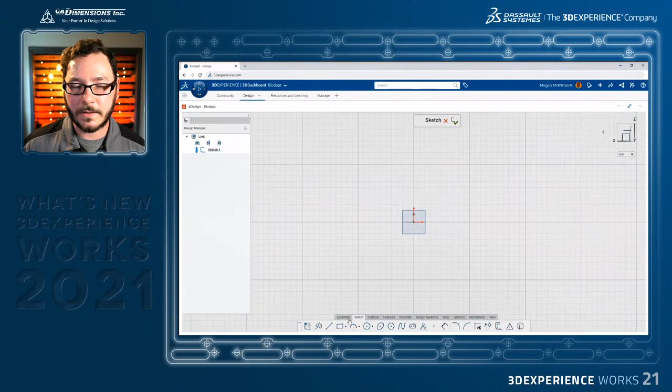Of course, these are integrated into the platform just like everything we've talked about so far, and regardless of where you're working from, all of your data is in the same place. You'll notice that this product, XDesign, looks suspiciously like SolidWorks, and that's intentional. If you already know how to use SolidWorks, you pretty much already know how to use XDesign. They're fairly similar, with some cool tricks up its sleeve.

But what I think is really cool about all of these things is no matter where they're originating, all of the data ends back in the same place. And that lets you do things like this, where we're setting up tasks for people to work on, whether it originated from the web or from SolidWorks.

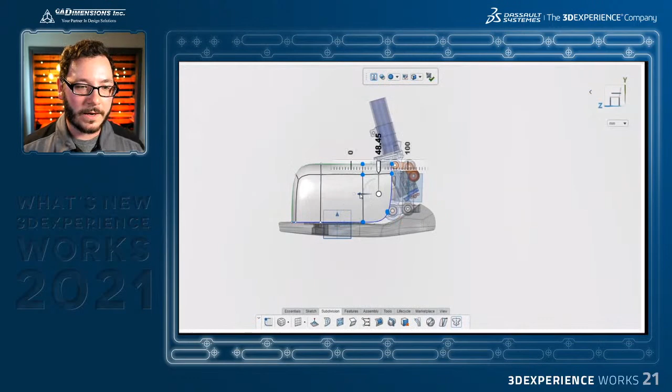Tagging in a user, please do this, and then linking in the actual engineering data to the task itself. So wherever they're coming from, Eric can get a notification to take a look and do some more work. In this case, he's using another cloud-based app, X-Shape, to do some fairly complex surfacing. Any free-form modeling available through that tool becomes fairly simple.

And again, all of that data then congregates back into one single place, making some markup, saying got it done, check this out. What I think is cool about those tools is that whichever angle you're working from, everything ends up converging into the same spot, which I think is really neat. Pretty cool workflow there, and all of that you can do right on a browser, phone, or whatever device, which is crazy cool.

So when can we get it? Well, it's out now, so all of that is already available. It's out there, being used as we speak. So the next question is, how can we get it? Obviously we sell it, but that's not what I mean. What options do we as SolidWorks users have for using this system?

It really breaks down into two options. The first is to keep your SolidWorks setup as it is, or purchase it new, and then add on the parts of the platform that you want to use. This results in a regular desktop version of SolidWorks, with a connector that gets your data to the platform.

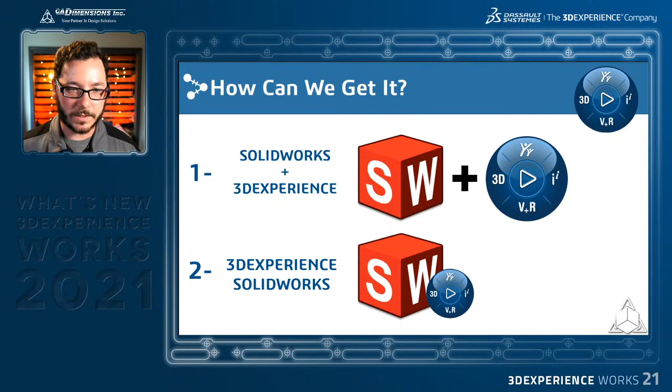The second, relatively new option is to go with or upgrade to one of the newer packages specifically designed to use the platform. This results in a SolidWorks Connected license, a variation of normal desktop SolidWorks, plus a selection of platform tools. There are some differences between regular desktop SolidWorks and SolidWorks Connected, so if you're interested, give us a call.

But the new packages break down similarly to how desktop packages do. The 3D Experience SolidWorks Standard includes SolidWorks Connected with built-in data management, plus the browser-based tool XDesign. Professional, like our desktop packages, adds photorealistic rendering with Visualize, and you also get X-Shape, the freeform modeling tool. And like our standard desktop packages, Premium adds in linear static on top of that, the platform version of linear static, so that data is being run there too. Pretty cool.

There's been a lot of buzz around the 3D Experience platform being the future of design tools. I think it's really best said when you flip that a little bit and say the future of design is collaboration, because that's the huge missing piece. Whether we think about it or not, getting the right information to the right people at the right times across an entire design cycle is an enormous task, and it's one that a lot of times we're too busy to focus on. That's really the piece I'm personally excited about with the 3D Experience platform, and I know a lot of us here are. So I couldn't leave the presentation without saying a little bit about that, because some awesome tools are on their way.